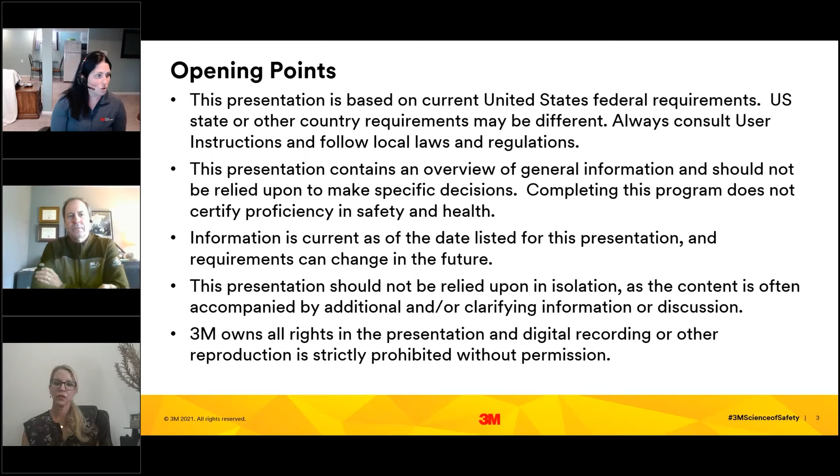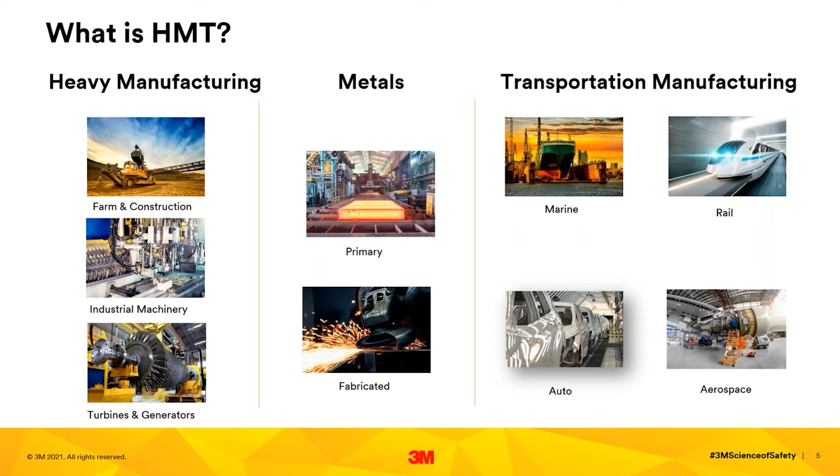So with that, we will get into our presentation here today with you, starting off with a bit of an industry overview. Within 3M, we have a variety of different segments that we focus on in terms of industrial markets. The biggest of which is HMT, an acronym standing for Heavy Manufacturing, Metals, and Transportation Manufacturing. This is a huge bucket, but certainly a market that we have put a lot of rigor behind developing specialized products for, as well as a variety of sales and marketing assets for our channel partners.

The way this rolls out, we look at it by NAICS code. The heavy manufacturing umbrella encompasses quite a few different subsegments under manufacturing. Out of scope for today's presentation is anything transportation service related, so any kind of commuter transport, as well as any mining activities, although many of the mining companies do also have smelting operations. So we will speak to the smelting, not the mining, but we do have a dedicated mining session that will come for you in the coming months.

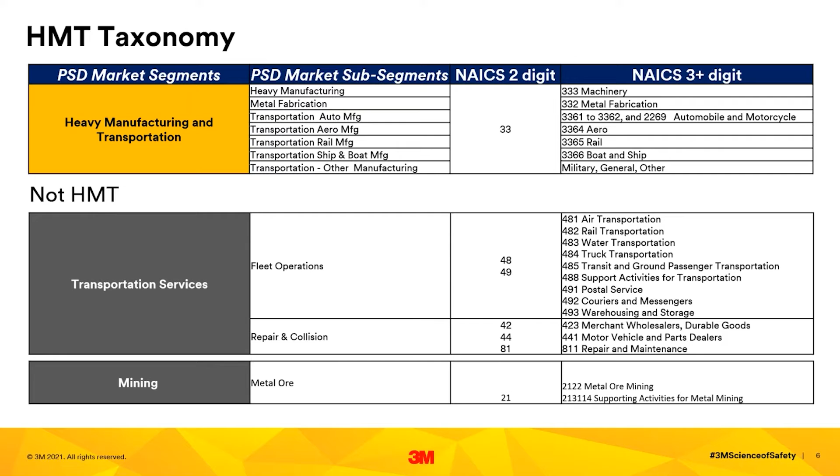In terms of the outlook of the North American market, last year we saw a number of challenges related to COVID. We saw major customers that were not operational or operating with a skeleton crew, so big declines in this market last year. We are now seeing some strong growth as this market begins to rebound and get back to normal, and we expect to see pretty sustainable growth in the medium and longer term as well. It's a very diversified market too, which is working in our favor.

In terms of addressable market for PPE, our analysts estimate that it's about a $1.3 billion market in North America, just shy of $1 billion in the US market.

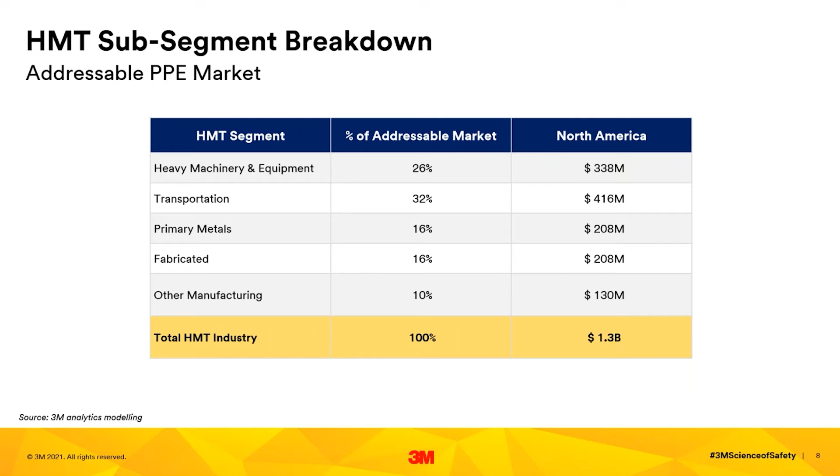In terms of subsegment breakdown, the heavy machinery and equipment and transportation manufacturing subsegments are the two biggest within the HMT umbrella. We're seeing a lot of opportunities in the transportation sector right now, and that's where we've told our reps to focus attention in the short term as things are returning to normal.

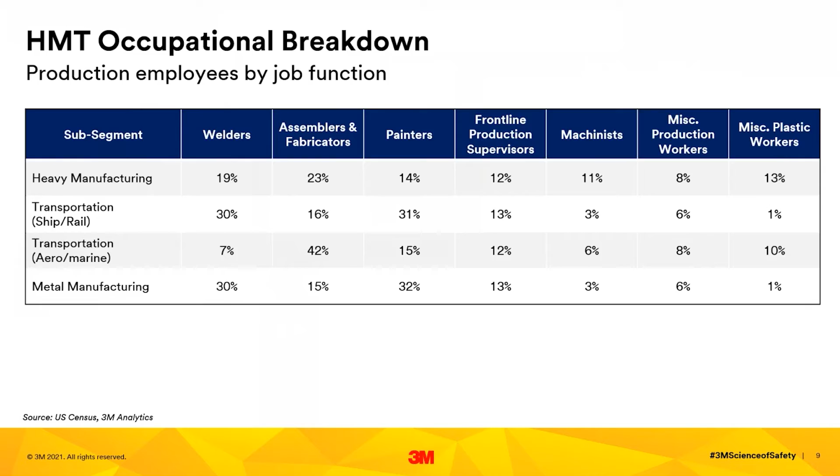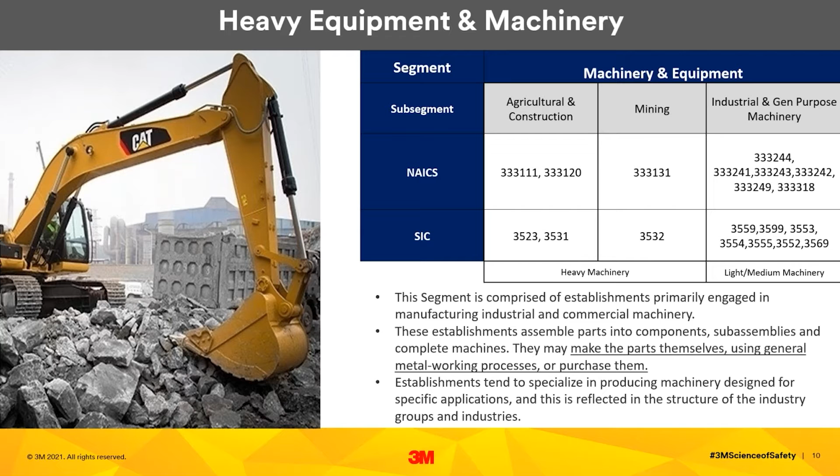In terms of breakdown, the heavy equipment and machinery subsegment includes everything from agricultural and construction equipment manufacturing, as well as mining equipment and general purpose machinery - anything manufactured for heavy industrial work, and any organization making these products themselves or doing the metalworking behind it. On the primary metals front, that includes the full gamut of foundries, aluminum, iron production, all sorts of different metal activities, and ferrous and non-ferrous metals as part of that as well.

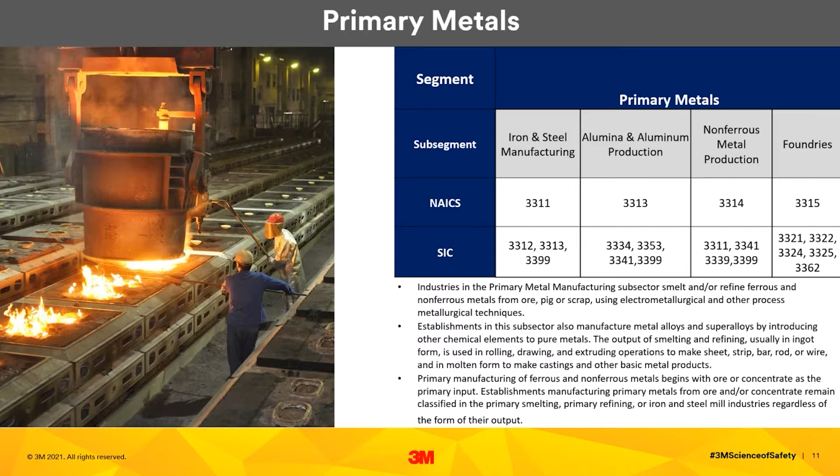On the transportation manufacturing side, we've got four key areas: motor vehicle manufacturing, which includes heavy motor vehicles, aerospace, rail, and then ship and boat building. You may not all have these specific sites in your territories depending on where you're located, but we see strong growth in these areas in particular. So if you have rail, ship, or aerospace in your territory, those are all really good customers to go after at this current state.

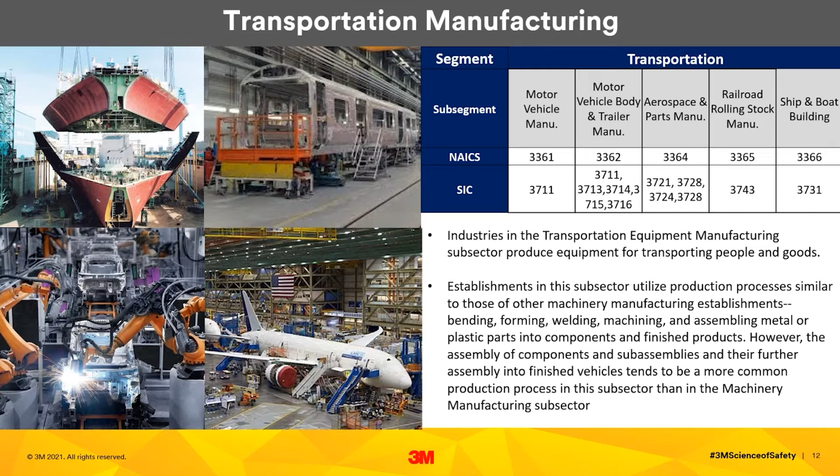I've provided a more detailed breakdown by the various crafts that you will get in the accompanying deck, but in the interest of time, we wanted to focus more on some of the sales techniques.

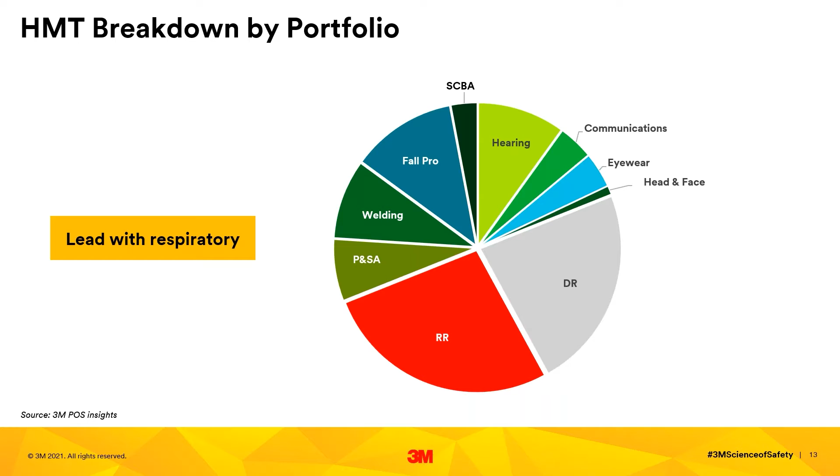When we look at how the HMT segment breakdown goes by portfolio, you can see this is very heavily weighted towards our respiratory portfolio - powered and supplied air, reusable respiratory, disposable respiratory. So when you're setting foot in these sites, we always say you should be leading with respiratory and asking those research and identifying questions based on respiratory first and foremost.

In terms of our segment methodology to selling, this is a slide we use to train our internal sales force as well as our inside sales team. When we're selling into a segment, we always say just try to solve the greatest problem. You may not be able to solve all of the problems they're experiencing at once, but find out what their particular pain point is and delve into that first. By understanding the business and the industry, you're able to ask intelligent questions that build trust with the customer and get the sale.

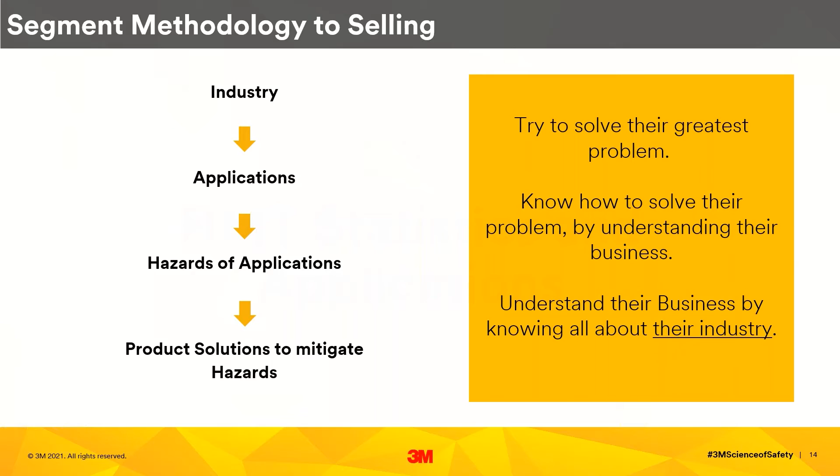Okay, so now I'll pass it off to my colleague Scott, who's going to go over some key applications as well as some statistics in this industry.

Great, thanks Dana, and hello everybody. What I want to cover today is a fairly high level overview of some injury and illness statistics for these HMT industries, as well as some common hazards that are encountered. Then I'll get into a little more detail on some of the hazards and applications towards the end of my part here too.

So what you see on this screen is US BLS statistics from 2019. These are injury and illness statistics, and what's shown is the number of recordable incidents by OSHA's definition - what OSHA requires manufacturers to report - and then the incident rate, or the injuries and illnesses per 100 full-time workers. If you look at that bottom row where it says all industries, that is the number of recordable injury incidents for all industries.

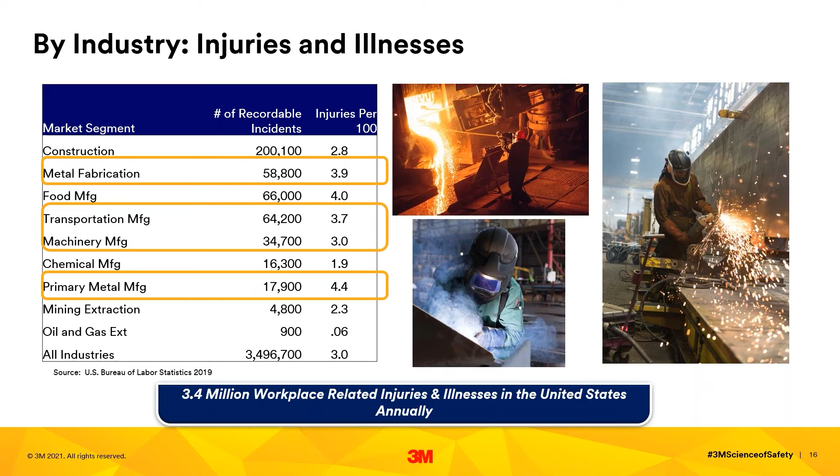If you look at the segments in the boxes, these are the HMT segments based on NAICS code. You will see, with the exception of machinery manufacturing, which is the same as the all industry average, metal fab, transportation manufacturing, and primary metal manufacturing are all higher. They all have higher incident rates than the average. So you can take this to mean that they have more injuries than the average and maybe higher risk at their facilities.

So a little more detail on the types of or the numbers of injuries: 176,000 non-fatal recordable injuries and illnesses per year. This is based on 2018 and 2019 BLS data. Of those, almost 100,000 result in lost work days, whether that's days away from the job, restriction, or job transfer.

Roughly 145 people died from these incidents over that time period. Of those deaths, 16% were due to slips, trips, or falls, and that can be either a fall to the same level or a fall to a lower level. About 15% of the deaths were due to exposure to harmful substances or environments, and 32% were due to contact with objects and equipment.

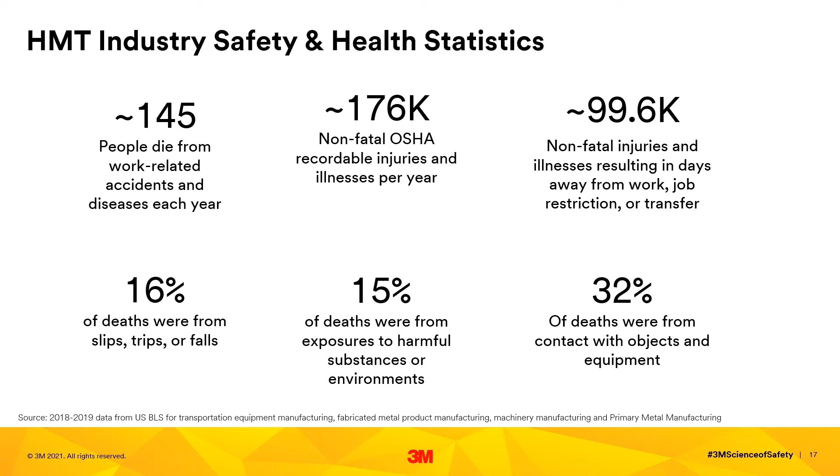Now, what you see on this slide is the most cited OSHA standards for HMT industries, a selection of those. This is again based on 2019 through 2020 data. And what I did is I looked at each NAICS code which was reported, and provided the number one cited standard.

So you can see it's either going to be lockout tagout or respiratory protection. And then I went down the list for each segment and picked the next top six that are related in some form to personal protective equipment use. Now you notice that respiratory protection is included in all four of these buckets, and that may not always be directly related to the use of PPE.

It may be a deficiency in a written program. It may be a lack of medical evaluation, but it could be fit testing. It could be something with selection and use. It could be a variety of different things. But respiratory protection is top 5 in each of these buckets.

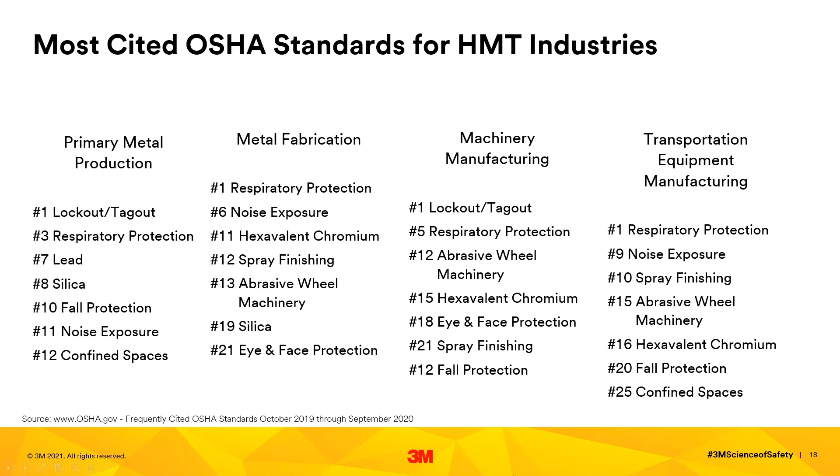Great. So at 3M we evaluated each type of industry: heavy machinery, metal manufacturing, and transportation, and picked out what we believe are the most common applications in these industries, that have the most number of workers in these different segments. So for example, heavy machinery includes welding, painting and coating, maintenance activities, assembly, and grinding and surface prep. And then those are going to be common in a lot of the other buckets, metal manufacturing and transportation as well.

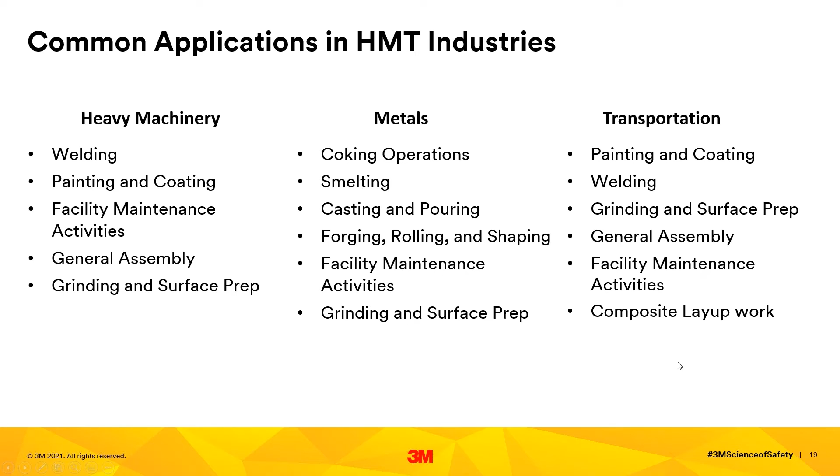And we've gone through, and you'll see some slides going forward, where we've gone through and looked at various applications. We picked the top 3 to focus on for this presentation, identified some of the more common hazards, identified common 3M solutions, as well as some additional 3M solutions that are not PPE related.

So if we look at welding, grinding, and surface prep, common hazards include arc radiation and welding fume from the welding process, dust, particulate exposures, eye injuries, noise-induced hearing loss, heat stress.

These are common hazards. The solutions, 3M solutions - again, we have a wide variety of solutions for many different applications. It's really up to the employer to assess their working environment, their conditions, their risks and hazards, and really up to the employer to select the most appropriate solution.

Now, we do offer, as far as respiratory protection, welding respirators, a lot of these integrated with powered and supplied air. We also have reusable respirators and disposable respirators, sometimes referred to as elastomeric facepiece respirators and filtering facepiece respirators, that can be used in addition to a welding shield.

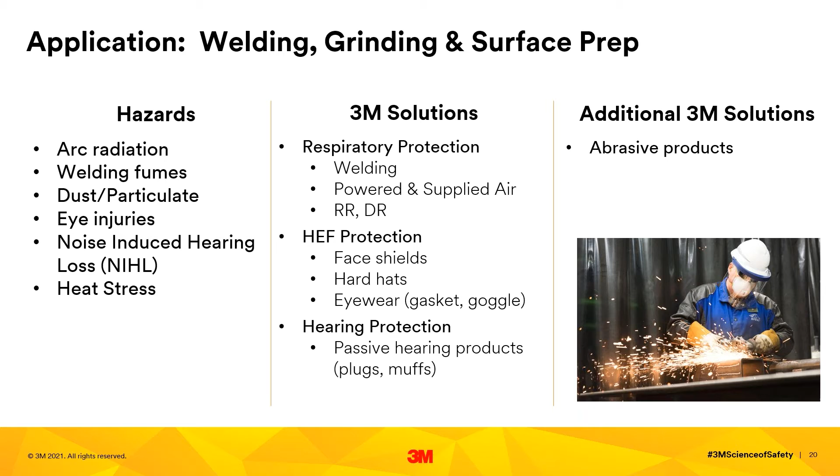For head, eye, face protection, a number of face shields, hard hats, and different eyewear, and of course hearing protection, whether it be an ear muff or ear plug, many different passive hearing solutions. With respect to additional 3M solutions, obviously our abrasive products are used very frequently in the grinding and surface prep applications. Next, Dana.

Looking at painting and coating, hazards can include airborne vapor and particulate from the spray application process, eye injuries, eye irritation, skin exposures from direct contact, heat stress in some cases, and noise-induced hearing loss.

And again, we've got a wide variety of solutions, reusable respirators for painting, to powered and supplied air systems for painting, protective coveralls to help protect the painters from contact with the chemicals, and different types of hearing protection. Again, passive hearing products, including various earplugs and ear muffs.

Additional solutions can include adhesive and tapes, a wide variety of products from our automotive aftermarket division, and various films and coatings.

And the third application I'm going to cover today is casting and pouring. So this would be related to the steel manufacturing, aluminum manufacturing, and foundry applications.

Metal fume, metal dust, very common in these industries, these applications. Radiant heat, infrared radiation, falling objects, eye injuries, thermal burns, and noise-induced hearing loss. Again, another common hazard.

As far as solutions, we've got a wide range of powered and supplied air respiratory protection, as well as, again, reusable respirators, disposable respirators. We have radiant heat kit accessories for use with our powered and supplied air systems to help reflect that radiant heat and provide protection and comfort.

For head, eye, face protection, we have a number of products that are designed for high heat applications. Elevated temp hard hat, aluminized face shields, various eyewear, some with tints and IR protection. And again, hearing protection, passive hearing products.

In addition to protective communications, now we've seen an increase in the need for communicating. An example would be a crane operator communicating with ground personnel when navigating overhead loads. That's something we're seeing in the foundry industries quite often these days.

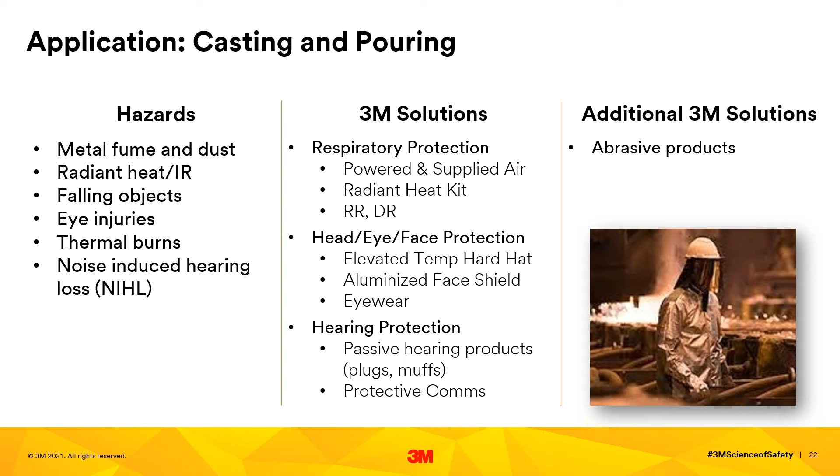So a little more detail on some specific types of hazards and injuries. One of the more common injuries we encounter when we work with our customers are eye injuries.

These can be due to high velocity particles, say from grinding applications, low velocity particles such as welding flux, welding fume, just that light particle that tends to float in the air, maybe from hot molten metal, whether that's from casting pouring operations or weld spatter during the weld process, and arc radiation from welding. That could include infrared radiation, ultraviolet radiation, and also visible light radiation.

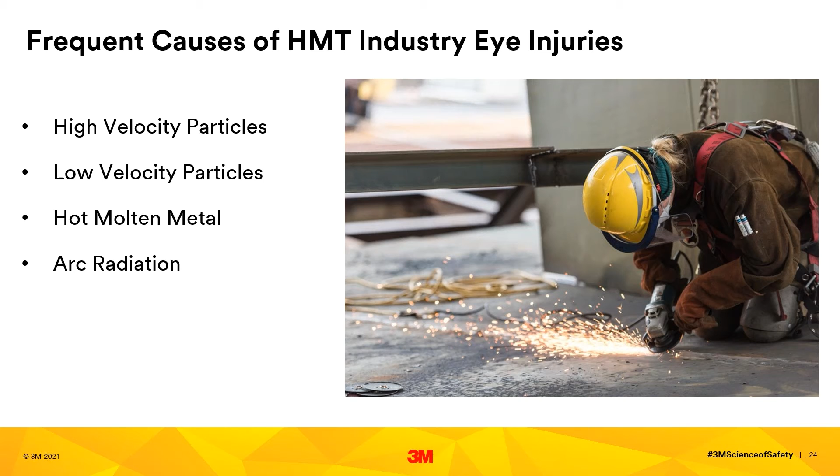Next. Another example of potential respiratory hazards specifically for welding are exposures to welding fumes. Now, welding fumes can include oxides of iron, oxides of zinc, manganese, hexavalent chrome, nickel, and aluminum.

Some of these fumes, for example, iron oxide, are fairly benign. However, they can cause some long-term effects on significant overexposure.

Zinc oxide or overexposure to zinc oxides can cause what we call metal fume fever. I'm sure if you've ever been in the welding process, welding field, you've heard of that type of illness. Manganese oxides overexposure can lead to manganism, and other neurological disorders.

Overexposures to hex chrome can lead to some forms of cancers, as well as nickel oxides, and of course aluminum oxides with welding on aluminum can lead to other types of respiratory hazards.

Now, studies have shown that the majority of the oxides and the metal fumes produced come from the consumables in the weld process. So about 90 to 95% of the fume generation comes from the welding rod or welding wire, where 5 to 10% comes from the base metal.

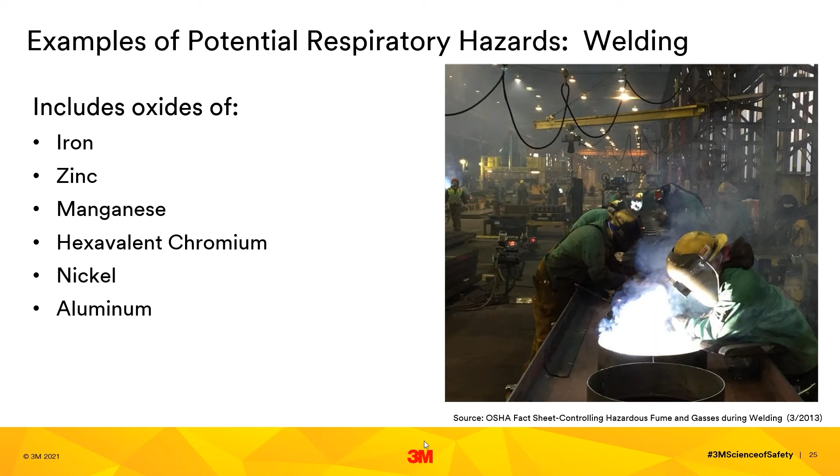So as employers look at assessing these operations, they need to look at both the base metal and the consumables to determine what the hazards may be. Next, Dana.

Silica, I'm sure you're all aware that several years ago, OSHA finalized their crystalline, respirable crystalline silica rules. There are several applications within the primary metal industry that can have a significant exposure to respirable crystalline silica. These include, for example, abrasive blasting, shakeout, fettling, mold making, and refractory repair and removal.

We did create several years ago a technical bulletin titled Adapting Metalworking Safety Programs for the New Silica Standard. So if you're interested, that can be found on our website. We're just searching that title on the internet, should bring that up for you. So lots of good information for you there if you're calling on those foundry and metalworking customers.

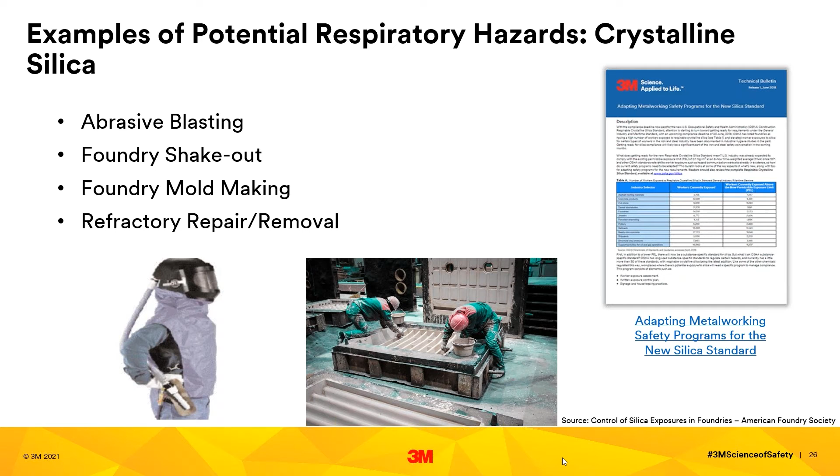Painting and coating, as you're all aware, most metals will require some type of treatment or coating to prevent corrosion. Commonly, these are sprayed with coatings for that treatment.

Common examples of respiratory hazards can include airborne particulates from both liquid paints and coating application and powder coatings, and organic vapor exposure from the solvent content in those paints and coatings. Solvent-based products are more of a concern normally. There's normally less risk with waterborne and water-based type products. However, it is still required that employers perform an assessment.

Other hazards can include triglycidyl isocyanurate, or TGIC, which is a component of a lot of powdered coatings. TGIC is a skin sensitizer, meaning repeated skin contact can lead to the development of an allergic reaction. Diisocyanates are components of polyurethane paint and coating systems like TGIC, and diisocyanates are skin and respiratory sensitizers.

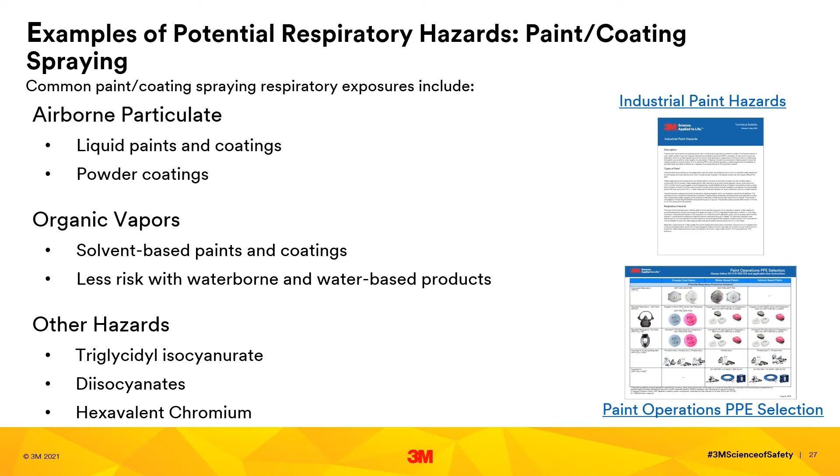Noise hazards. Noise is everywhere, as we know. Within the HMT industries, common applications may include welding, grinding, sanding, abrasive blasting, arc gouging, forging, stamping, machining, and machine noise. All of these can produce high levels of noise, oftentimes above the OSHA PEL or action levels, if workers are exposed for a prolonged period of time.

It's extremely important that employers conduct an assessment, conduct noise monitoring, identify which of those operations and which workers are exposed, and implement appropriate controls.

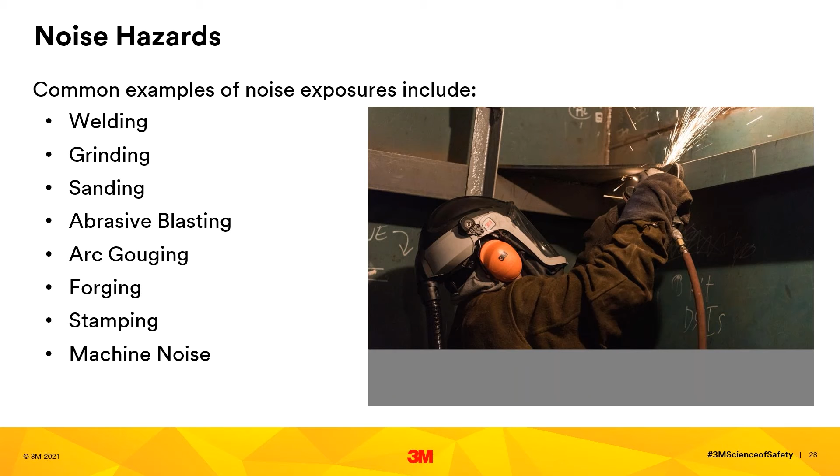We are approaching spring summer season, which means the risk of heat stress in most areas will be increasing. In the foundry metal manufacturing type industries, this is a typical normal occurrence, working with molten metal and near furnaces. It's important that employers monitor the work environment, workers take breaks and hydrate, and limit time in those high heat areas.

As with all hazards, we need to consider engineering and or administrative controls to reduce risk. And if PPE is going to be used, there are some solutions which can help reduce risk of heat stress. These may include reflective clothing to reflect heat for furnace operators and such, as well as cooling valves for supplied air systems, which can reduce the temperature of the incoming air.

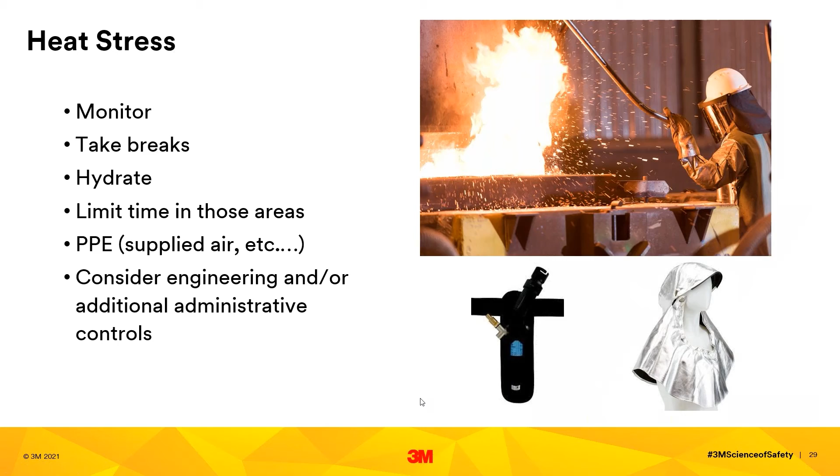Confined space, I believe this is my last slide. Confined spaces in metalworking are everywhere, in every industry.

Confined spaces in the HMT industries can include facility-related spaces, such as storage tanks, wastewater pits, pipe chases, and pipe tunnels. They can also be present in process operations, painting, coating, or welding inside of a storage vessel, painting, welding inside of a tank car, or painting and coating in a ship bulkhead or ship compartment. These are all examples of confined spaces in the HMT industries.

It's important to remember that the applications, the work being performed in these spaces, can result in lower air quality than when that worker entered. For example, grinding or welding in a confined space will generate welding fume and maybe some gases from the weld process that may change the atmosphere.

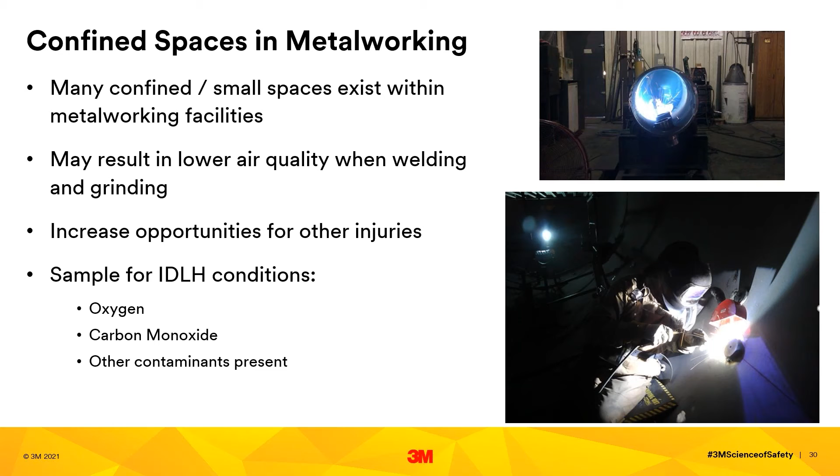It's extremely important that employers monitor the atmosphere of those confined spaces before and during entry. So you'd look at oxygen content, carbon monoxide, other contaminants present, lower explosive limit, and others, depending on what process and what is in those confined spaces to begin with.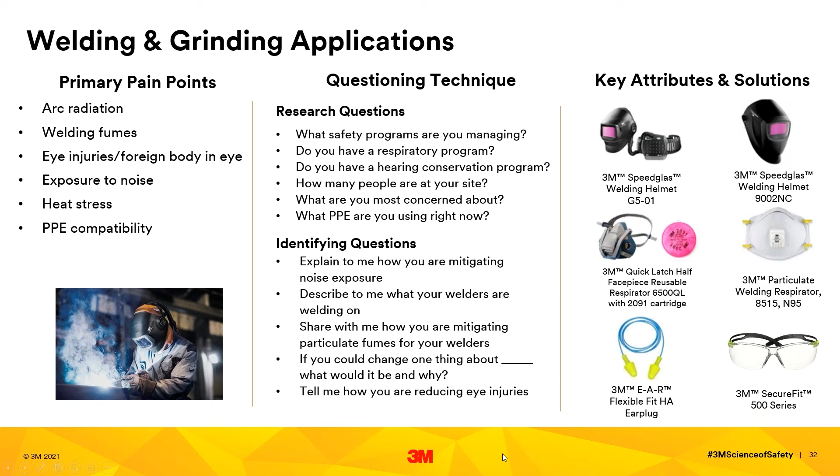A follow-up identifying question to really dig deep could be: if you could change one thing about the PPE that you offer your employees, what would it be and why?

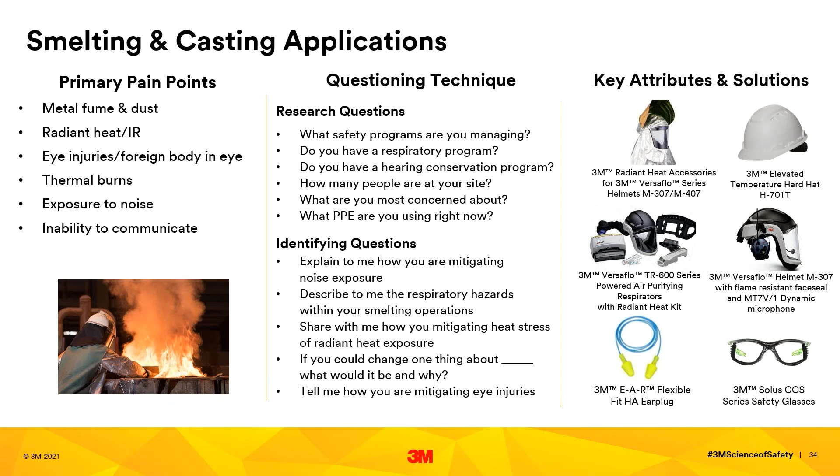If it's working at height, another research question to ask would be, how long are your employees working at height? If they say 6 to 8 hours a day, we need to hone in on that and suggest something comfortable, a durable harness that's adequate for all day wear.

Another research question to help with the selection process regarding harnesses: are your employees working at height, are they going to be carrying tools? If they say yes, we would want to suggest a harness with a belt for tool attachment. The ExoFit NEX series has many harness options to meet the needs of workers working at height.

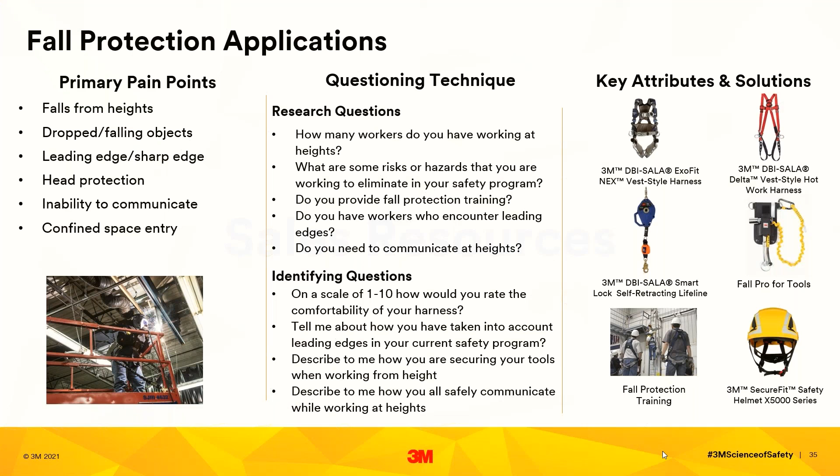Remember, I'm talking fall protection - the National Safety Stand Down to prevent falls in construction is scheduled for May 3rd through 7th. So I'm now at my end. Hopefully you gathered I'm very passionate about safety, and I really hope you got some takeaways about how to sell effectively in HMT. Thanks for your attention and stay safe.

Thanks so much, Nikki. Okay, we've provided in the accompanying package some quick links to a variety of different sales resources that might be helpful to you in the HMT industry. So we have a quick reference 3E selling guide, and some information on channel promotions for welding products, as well as some multimedia assets there.

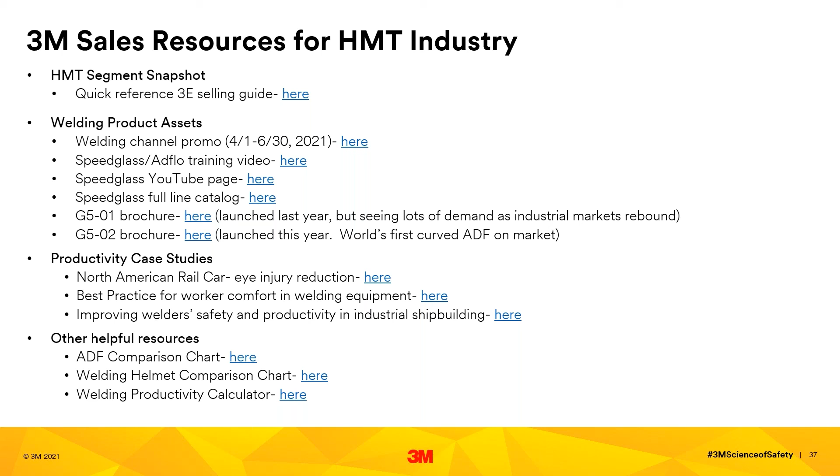I'd encourage you as well to have a peek at the productivity case studies. Scott and the team have put together some really great end user case studies that go through some of the productivity and comfort statistics directly from on-site studies. We've also provided a couple of other resources, as well as a whole host of COVID-specific resources for these industries. So please do have a peek there.

As I mentioned, we will be partnering with the AD Safety Network to deliver specific industry training sessions in the coming months, the next of which is construction on the Friday of Safety Stand Down Week. As Nikki mentioned, that is a big program for us as well on the fall protection side. We have circulated a stand down toolkit to our channel partners. If you did not receive that, feel free to reach out to me and I'm happy to circulate that to you as well. Then we'll do mining, pharma, and food and bev, so hopefully you'll be able to join us for those coming sessions as well.